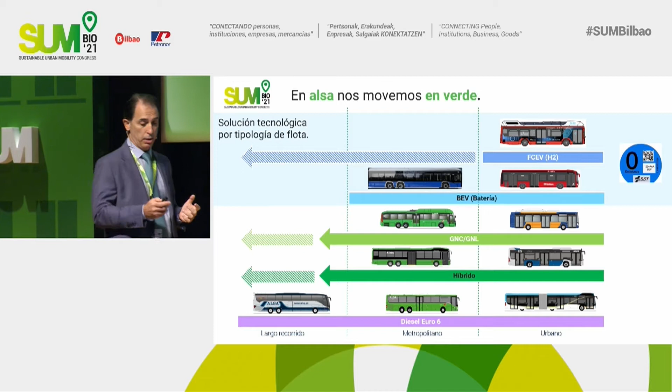We are working on them, but what we do know is that at the moment the only zero emission solution that could give us the answer in the future is hydrogen, because in the tests we are doing, we see that it will be able to cover long distances, and these are complementary technologies for us. All of them are going to survive, all of them are going to live in one way or another, but if we want to reach zero emissions, we have to combine batteries and hydrogen.

So that you can capture the idea, despite the pandemic, we haven't stopped in these last two years. We wanted to prove these technologies because, as operators, we are bound to do this as soon as possible. And in this case, really, the offer in the market is very, very scarce. We have just two solutions from manufacturers that have got important industrial capacity, after-sales capacity, and are reliable and sustainable: Toyota Caetano and CAF Solaris.

In the case of CAF Solaris, we will start to test it after this Congress, and in the case of Toyota Caetano, we have been testing it for some months, almost 1 year, so that you can capture the idea.

Some slides here: the most important thing about these vehicles is that they are very similar to the urban ones we have right now, but the main point is that, according to the manufacturer, the time for refueling is less than 9 minutes. With electrical vehicles, one of the most delicate points is the night recharge, because we are talking about 6 hours.

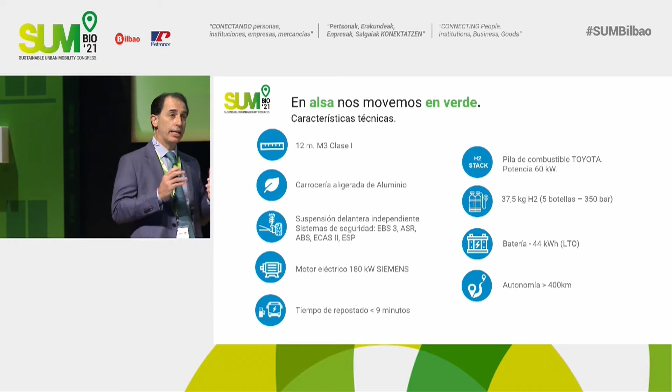So that you can capture the idea, these vehicles have tanks of 37 kilograms, at more or less 350 bars, which is really a respectable pressure. A very interesting point here is that the autonomous range of the vehicle could really overcome 400 kilometers, and apart from this, there are a couple of batteries, so that you can capture the idea.

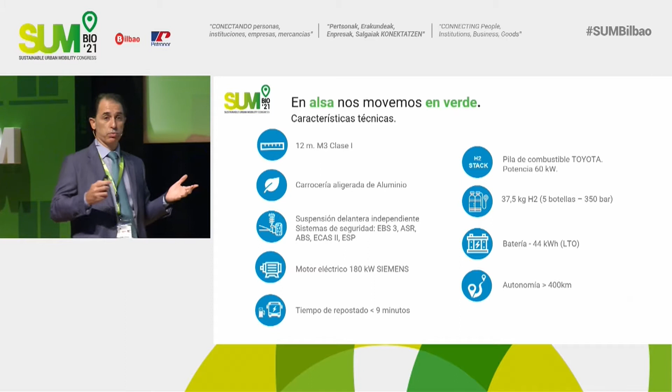The traditional mechanical chain - motor, engine, gears and so on - is on the upper part, the same as in electrical vehicles, with 4 main elements: the pack of batteries, which doesn't cover the whole pack as in an electrical vehicle; second, the deposits, in this case of hydrogen, about 40 kilos; then we have conditioned air, and the fuel cell stack. With an electrical motor on the axis, we have got everything. At the level of maintenance, that should be quite simple.

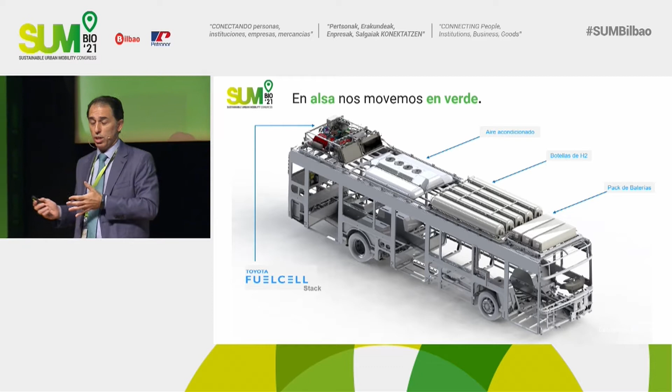In order to know all these things, we are always very curious, and we wanted to test it from the very first moment. So the same as in the roadmap of hydrogen, we made the ALSA roadmap, and we are going to test and prove the vehicles of hydrogen.

What we have defined is to test in all our operations the vehicles in every condition. This is really key for all of us in order to know how reliable they are, how profitable they are, how they operate. There's a topic which is not a minor one: the one of the charging. Hydrogen is said to be the vector of the future, but we have to find a solution for how to charge these vehicles when there isn't a network yet.

We are accompanied by a portable load station for hydrogen that travels with us in the different movements. This isn't a solution for the future, but it is a solution that, with this green hydrogen, allows us to test these vehicles in a direct way.

This road has taken us, first of all, a lot through Madrid. Then we were testing it for 3 months in Oviedo, because there we also had lines of different profiles, which was very convenient. Quite recently we went to Almeria, and right now, making the most of the sun, we have got it here. We had already foreseen to make the most of this, and in the coming weeks you are going to see it circulating along the streets of Bilbao, because it's going to start functioning in order to compare it with the rest of the vehicles.

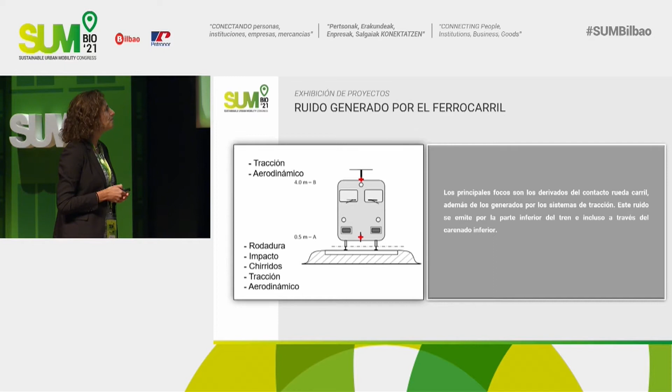First of all, what we did was to analyze the source of the noise. In the case of the railway, our lines have got a maximum velocity of 80 kilometers per hour, so this is a low speed, and in the urban areas where we want to act, it is even less. Really, the contact between the wheel and the rail is the source of the noise. So we wanted to create an element that would try to isolate the noise, getting as close as possible to the source of it, the contact of the wheel and the rail.

What we did was to analyze how traditional systems, these acoustic screens we all know, function on every road. Those are a vertical element which is an obstacle for the propagation of the noise waves, generating an area of acoustic shadow. We have got an effect on the final part of it, of diffraction of the waves, which decreases this area of acoustic shadow. And we have to think too that the efficiency of the screens depends on whether they have got absorbing material or not.

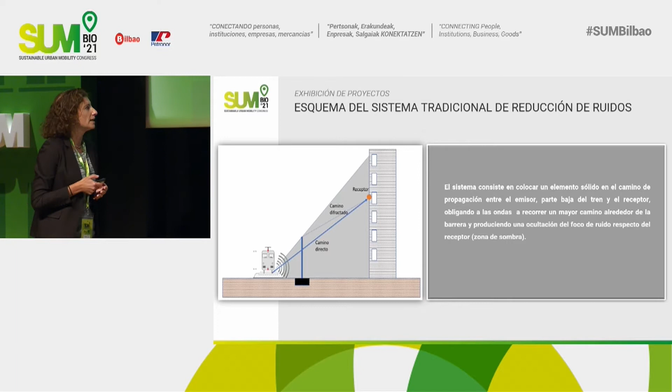What we wanted was to define an element that would solve this diffraction of the waves, and apart from this, in order to improve the acoustic efficiency, should have absorbing material too. Therefore, we wanted to create barriers of low height that would get as close as possible to the source of the noise, and should be minimally visually intrusive. This is what we want to implement in urban centers, and the traditional screens had got a height from 3 to 6 meters.

Quite often we have suggested to the neighbors, in order to help solve their acoustic problem, to place those traditional screens, and they have said no, they prefer to see the train and to listen to the train instead of having a wall of 5 meters in front of their houses. So we were looking for an element that wouldn't be so intrusive at the visual level.

As we wanted to place them close to the source of the noise, we placed it within the domain of the railway. Therefore, they had to be a compatible element with the railway installations. It didn't have to have any cementation, because if we must make a cementation, we are affecting the railway installations, and that was the problem of the traditional screens. The heights of 3-5 meters produce an effect that has to be compensated with very important cementation.

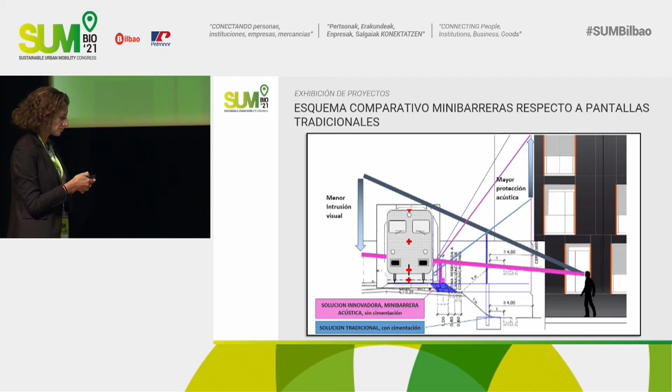So therefore, you have to look for areas outside of this railway domain, and you need really to make expropriations too, so that the screens would function perfectly. We should place them one on each side of the railway. This is a section in a double railway, and we can see here how those screens must be placed, but always respecting the aerodynamics of the train.

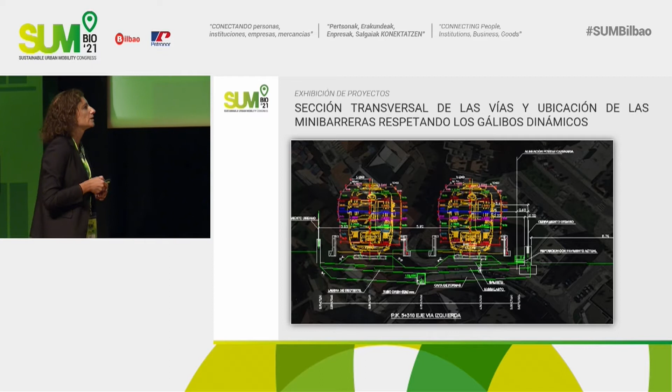This guaranteed that the mini screens should be compatible with the machinery of the maintenance of the railway. That is something very important for us as managers, and also being in charge of maintenance as we are. Once we already had the clear criteria of design, together with Tecnalia, we made the models of this acoustic behavior of the geometrical design we had.

The next thing was to manufacture them with the cooperation of Bexa. Those were the modules, modules of concrete, 2 meters long, 120 height. And if you look at them, there is a kind of beam on the upper part, and this is the one solving the problem of the diffraction of the waves.

And that's why we are improving its acoustic efficiency. The holes are the areas that allow sound to enter the inner part where the absorbing material is, which in turn is protected by a layer so that it avoids getting dirty because of dust.

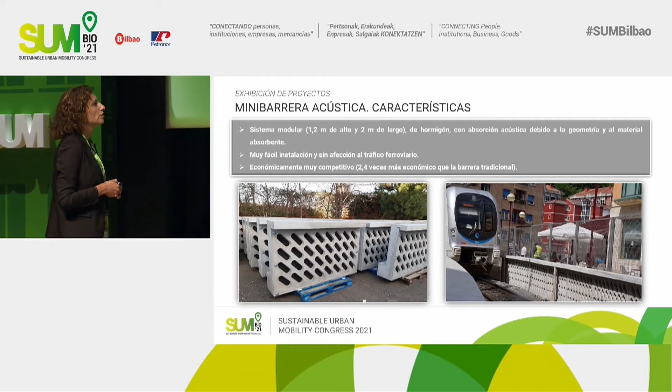They are self-carrying and can be placed very easily with a normal lorry or crane, so the influence on traffic is really minimal. There is no maintenance need, and all these features have an effect on the economy. They are very competitive economically compared to traditional screens, achieving, as we will see now, even better results at the level of acoustic absorption.

So once we had the modules, we had to put them to the test. We chose the municipality of Ermua to install them and see how they were really working. Why Ermua? Because it is an area especially polluted at an acoustic level.

We have the station, and in order to reach it, there is a very steep curve with a very small radius, 80 meters. This, joined with the fact that the train is braking or accelerating to access the station, makes it creak in a frequency that is very disturbing for human ears. In this area, there are many railway installations, putting all these mini barriers to the test at the time of placing them. We also have facades that are just 4 meters away from the railway.

So, logically, before installing them we adopted acoustic measures, and then we repeated the same measurements afterward, and these are the results. In the graphics down there, we have via 1 and via 2. In orange you can see the decibels obtained before the installation, and in red, the ones after. Visually we can appreciate a difference in the measurement of this sound, and this difference is represented in the bar graphics up there.

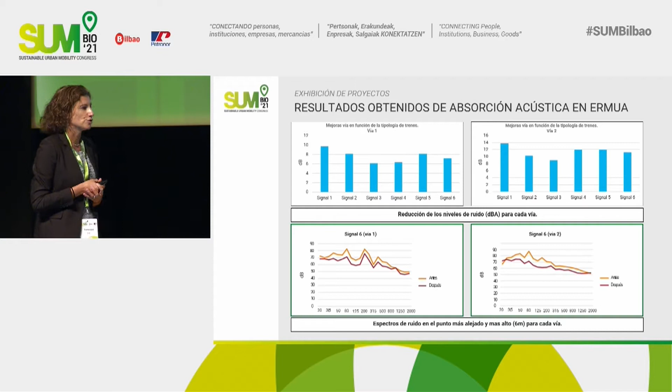The average absorption is 10, and we have even reached 14 in some cases. For those not used to dealing with these acoustic values, decibels have a logarithmic scale. So achieving a reduction of 10 decibels through these mini barriers is, for the human ear, the same as eliminating 9 out of 10 trains of railway traffic.

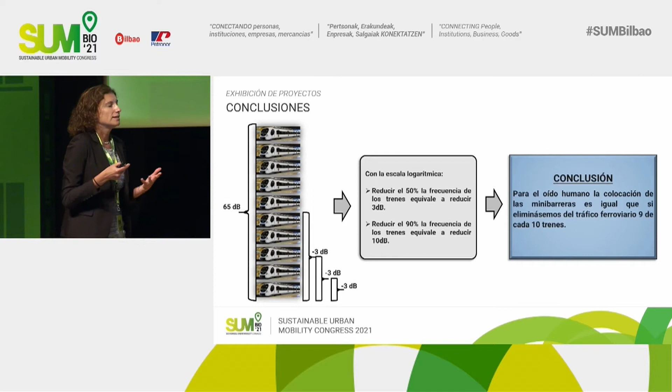With these results being so positive, we dared to apply for an international award of innovation in Finland, the Quality Innovation Award, and we were lucky to be given first prize in the category of public service. As it couldn't be a presential meeting, for the concession of the award they asked us to make a video explaining what this Eusko Trenbide Sarea project was and what we did. So I'm going to end with this video, which is very short, but it will help you understand what I have tried to transmit to you.

Doesn't work. Oh my god. Do we have it or not? Okay, well, it's a pity. It's a real pity. Okay, it's a pity we can't see it. I'm so sorry, I'm so sorry.

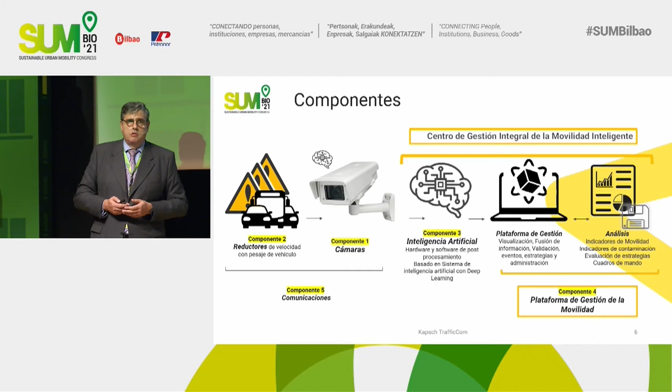That's why those algorithms are so important, because this allows us to identify these models of mobility well, used through a management platform that is going to integrate this information, that is going to develop predictive and operative models to manage it, and obviously measured using the historical data and the behavior, in order to predict and somehow plan it in the right way.

If we enter into these camera systems quite briefly, we are going to install, apart from the existing ones, 40 additional cameras in the old part of the city. We are going to do many things, such as register the registration number of the vehicle and classify all vehicles by brand, color, size, and kind of vehicle.

And as Alfonso said this morning, it's very important, the logistics of the last mile, something fundamental, especially in a city as complicated as Santiago, with such complicated equipment in the city itself. So we need to identify all these vehicles and goods, integrating it with other databases of the city in order to classify it, because in order to know them well, we are going to monitor their behavior.

We are not going to focus just on vehicles, but also on pedestrians. There is no new mobility without also this control, or monitorization, of the individual pedestrian. We have to monitor that, and extract data, and we are going to use these algorithms to identify them according to their type, flows, and also in real time. We are not interested in the behavior of people individually, but as a whole, especially to be able to manage them, to identify them, and to plan for the future.

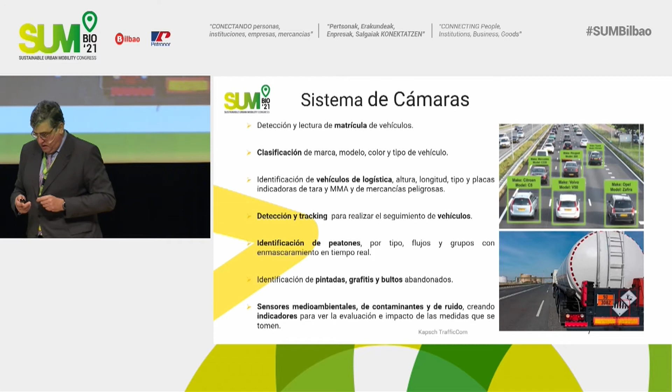So we are going to incorporate specific sensors in order to measure pollution. We have included a group of indicators that is going to allow us to monitor this in the right way, because without measuring it, we cannot do anything, and we are not measuring pollution well. This is something we have to say. And then another aspect: we have all the processes that we cannot develop just with the cameras, and we need a specific algorithm.

So in this whole, information has to be transferred into useful data. Those techniques of artificial intelligence, big data and analytics are so important and necessary to use this information, and how we need to use it for the traffic of wares, and to start designing strategies for the last mile, something very important also for private vehicles, and as I have told you, for pollution, integrated in a global model.

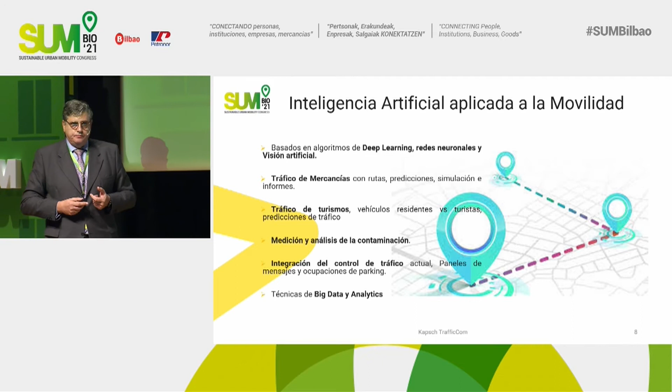Okay, now we have got the information, we have got the useful information. What do we do with it? This is important, because the useful information, if I don't use it, is good for nothing. So what for? To plan.

So it is important, how do we dimension our problem? What is the demand of services like? And I was saying that we do not have only to know it, but we have to exert influence on it if we want to manage this mobility for the future in the right way.

And what is the distribution like of this logistics of the last mile? Or how is the planning of cleaning, or the policies of cleaning, improved, and how can vehicles be used in a more efficient way?

So we have to manage. So I'm not only planning, I have to manage, I have to see what is happening. I have to anticipate what is happening from all the information we are receiving, and which is the best protocol. We have to test.

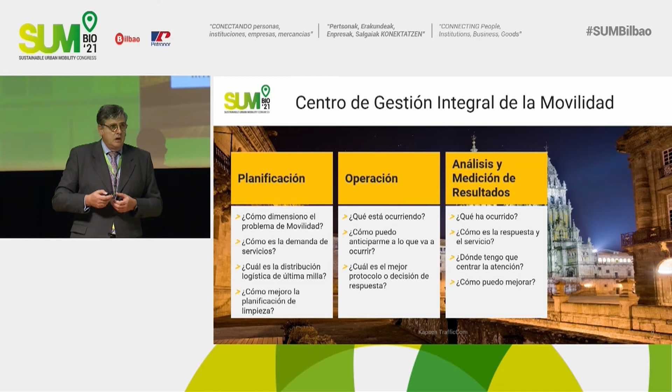So we'll test it and we'll have to measure. In order to measure, we'll use these techniques I've mentioned before, using all these databases, in order to see this behavior, to predict when there can be big masses of people in certain places, or which are the places with this people agglomeration, or how this delivery of wares is taking place, at what time, and so on.

And last, in a society where all of us are connected and information is so important, it is also fundamental to let this information be known, to inform in the right way, and to use the transparency of data, because as administration we are not isolated, we are interconnected with everyone. So the transparency of data, this transference of data, this interoperability, is really very important.

So to sum up, which are the benefits we've got? Or which are the benefits we expect to have from the point of view of the citizens? Some of them are obvious: bigger efficiency in mobility, bigger safety, better management in the cleanliness of the roads, more information in order to use the means of transport, and so on.

How can the citizen have access to this for the very city? On the one hand, we are positioned in the city in an avant-garde place with a qualitative jump. In this project, we are reusing all the systems of the city. We are going to use all of them, so the whole investment can be used in an integrative way, to integrate all these elements.

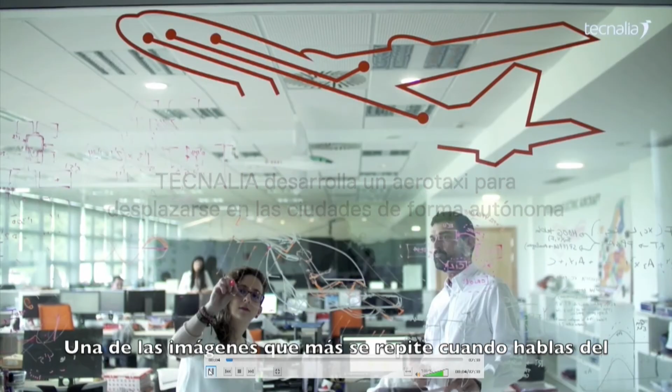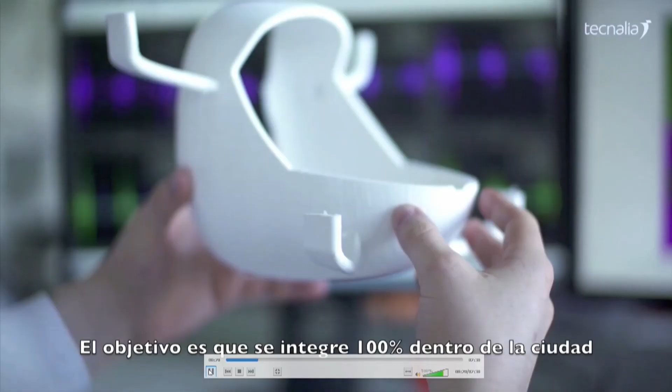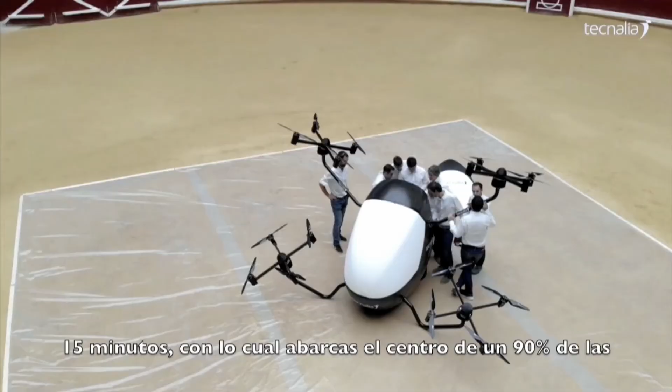One of the images we repeat more often when we talk about the future are those flying cars moving in an urban environment among the buildings in the city. We opt for an air taxi for urban air mobility, electrical, for one person. The goal is to be integrated 100% in the city in its dimensions, so that it can park in a parking place for a car. Nowadays, with 15 kilometers, 15 minutes, you can reach the center of 90% of the cities at the worldwide level.

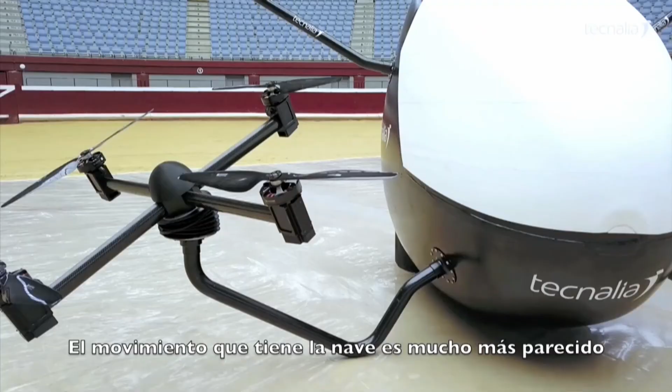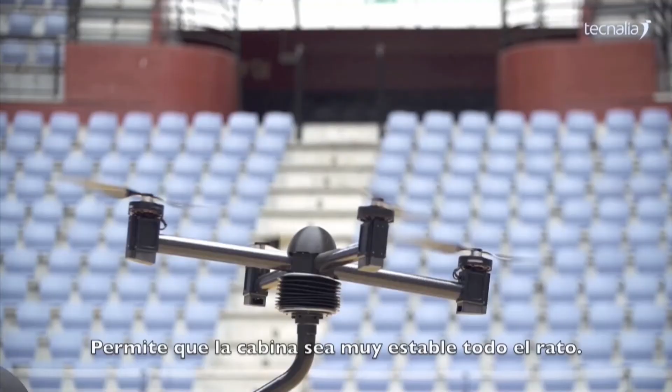The movement that the aircraft has is more similar to the one of the vehicles we all use on a daily basis, such as the bus, the car, and so on. This is the difference regarding the existing things nowadays in the market. It allows the cabin to be very steady.

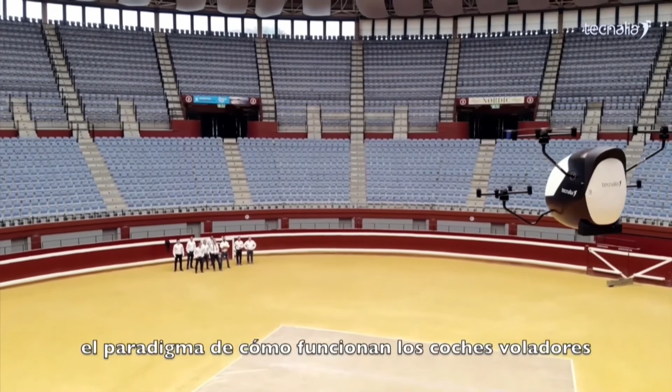It's not necessary to make any kind of movement in the side part and the itinerary, and this is the point that can change the paradigm of how flying cars function nowadays. It must be integrated in the city. Being well integrated is something very appreciated by people.

It must be ecological and efficient at the energetic level. The day of the flight, in order to take away all kinds of safety concerns, to place the batteries and make it fly, we had the uncertainty of what was going to happen. And then we were really very happy when we saw that it could fly, and the goals we wanted to achieve had been fulfilled.

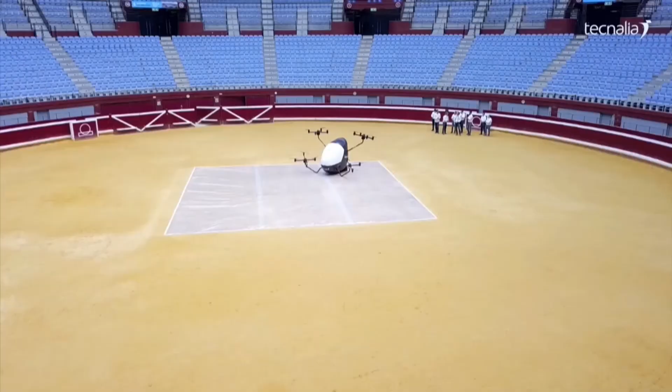Air mobility of the future. Now I'm here.

Lovely. And the more I see it, the more I like it. Seems to be the future right here.

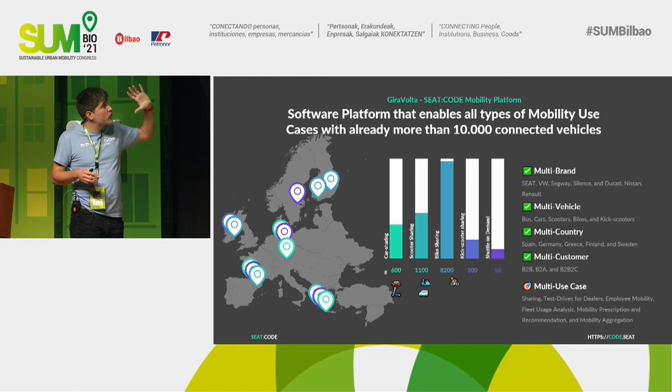We have a mobility platform with 600 vehicles connected. We have 1,100 scooters, 8,200 bicycles, 300 scooters, and 50 buses too. So mobility as we understand it in SEAT Code is holistic, integral, and compared to my colleagues, instead of being focused on the product, we are focused on the final user.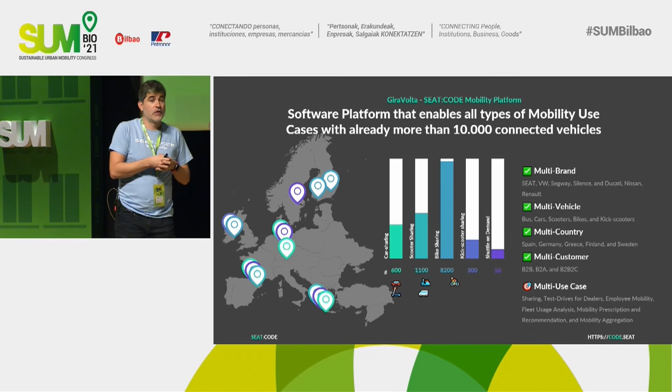We understand that mobility is multi-brand. I'm working in SEAT, but when we go to company B, perhaps they have helicopters, drones, or bicycles—nothing happens. So mobility is holistic. We must have a solution that allows us to connect different brands, existing or non-existing.

It must also be multi-vehicle, because we can go to a city and they may have just a fleet of buses, but they can also have a fleet of municipal bicycles, of share cars. So the kind of vehicles we can have are really very different. We want to find a solution that can integrate every kind of vehicle, for instance, helicopters available too.

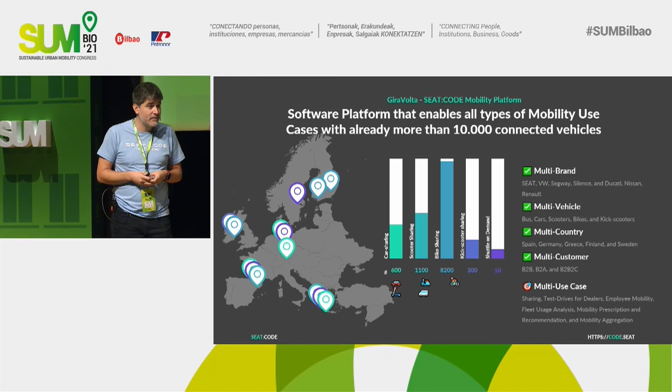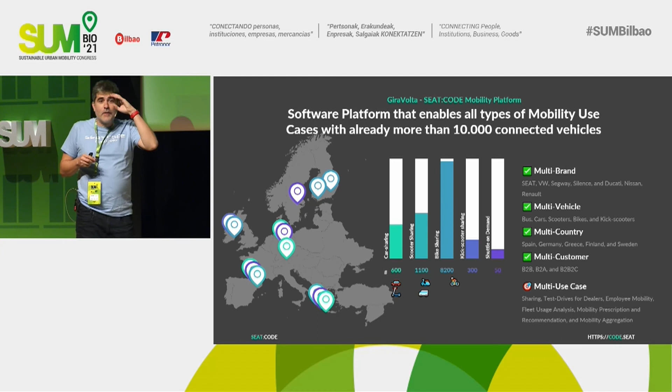So it's multi-country, and apart from that, multi-user. We have been thinking of mobility in a traditional way, but if we think not on an individual basis but a collective one, such as a Netflix platform you enjoy with friends or other people—multi-customer means understanding mobility not only individually, but also for a circle of friends that can enjoy it too. So we found the solution, thinking of several cases of use: corporate, for cities, and so on.

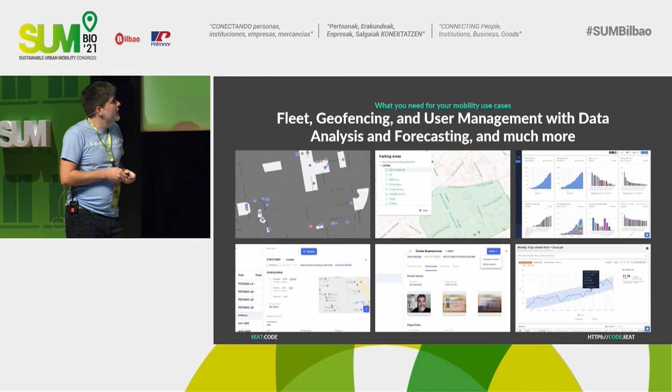So the solution is what you would expect from a technological company: fleet management, control, forecast of demand, geofencing, and all the facilities you could think of and more. The relevant part is not the product itself. We are offering white label and customizable solutions. For instance, for the Bilbao town hall, they need an app that integrates scooters, bicycles, and everything. We offer these mobile solutions, and also the whole operation of the fleet based on the backend and so on. I'm going to show you the cases we have got here.

First of all, we have got the case of Barcelona. We are operating with this fleet of SEAT vehicles that has been launched by our sister company in the mobility service. We have got the systems deployed in Barcelona with a platform that we have in the cloud. So you go there, you take your motorbike, you book it, you start it, you go to see your parents, you make a rate, you pay more, you pay less. You have a discount on a monthly basis, on a daily basis. So we do this in Barcelona right now.

And we do more or less the same in Finland with fleets of bicycles. The operators make tenders for the public service, this management of bicycles, and they need a robust solution. What happens is a big amount of these bicycle manufacturers are Chinese, and so on, both hardware and software. So to have somebody in Barcelona committed and who knows about mobility - because the good thing is that we have 70 years of history - means we are a reliable partner when it comes to operating services at the software level, the digital one, and so on.